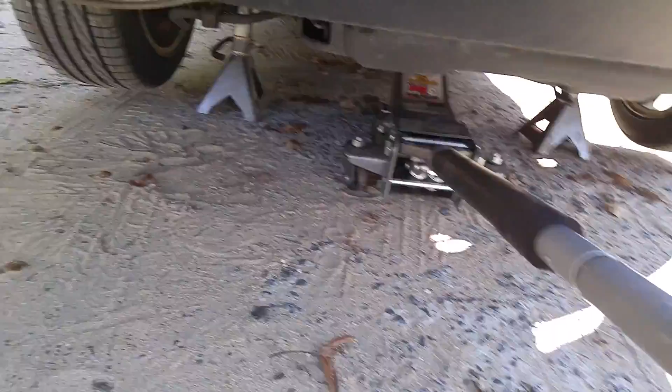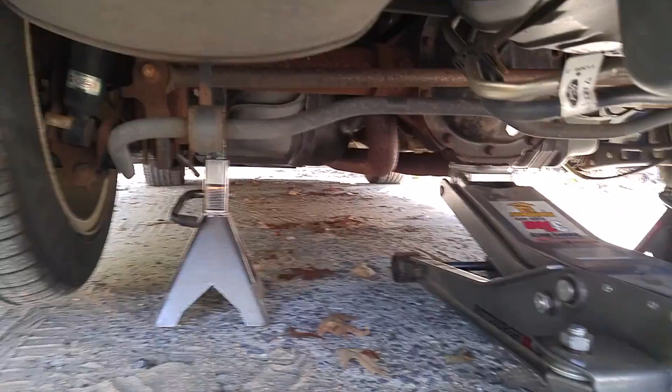First thing you want to do is jack up the rear of your vehicle. Put your jack under the rear diff. Make sure you don't put it on the differential drain pan that you actually bolt in. Put it underneath where it doesn't touch the drain pan, right under there. Jack it up and put a jack stand on each side of your axle.

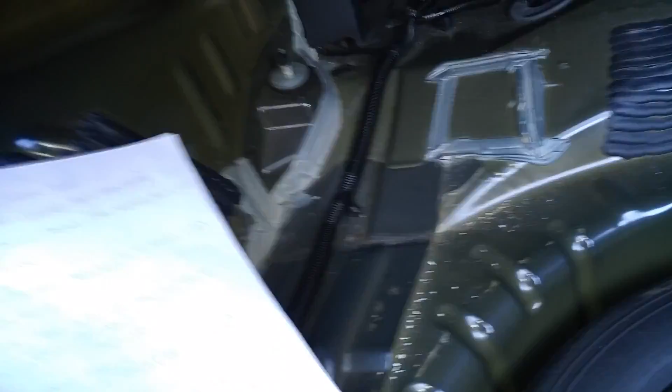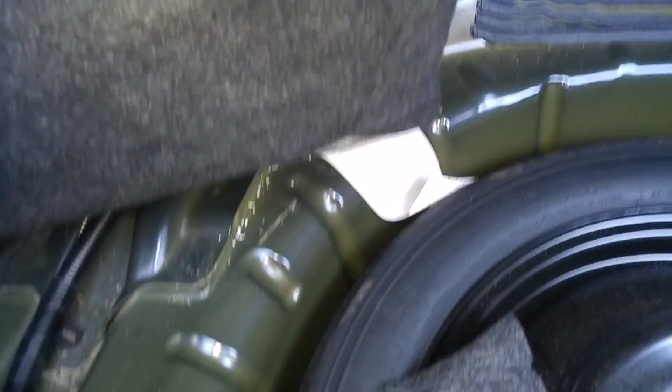After you do that, you want to come up and open up your trunk. When you open up your trunk, you want to take out these panels. These panels can go back like this. What you want to do is just remove your panel. The floor panel comes out easily. This panel you just take out and wrap it around, tuck underneath there.

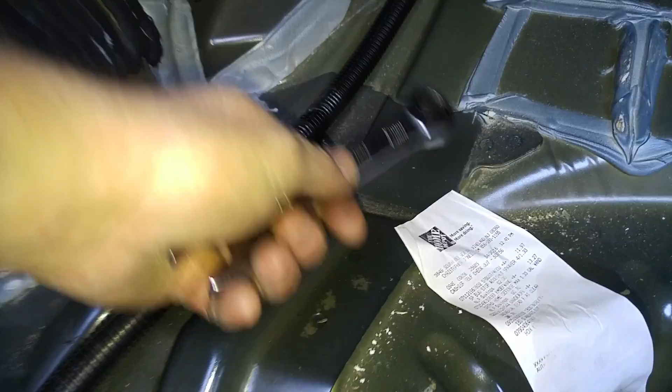Right here is the top of your shock. Alright, you got a bolt there. You take this out. That nut right there is a 15 millimeter nut. I'm gonna put that on top of there, I'm just gonna leave it there. If you try to take that out, it's just gonna turn.

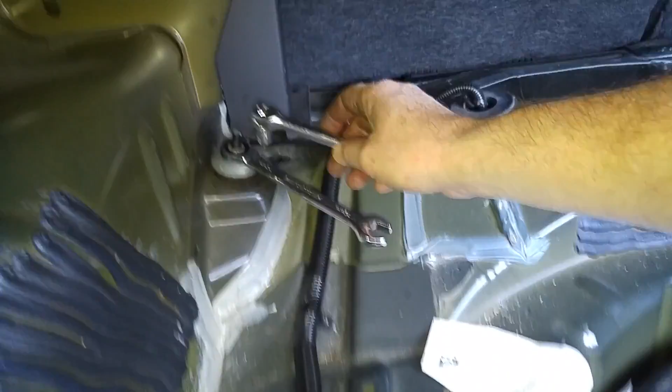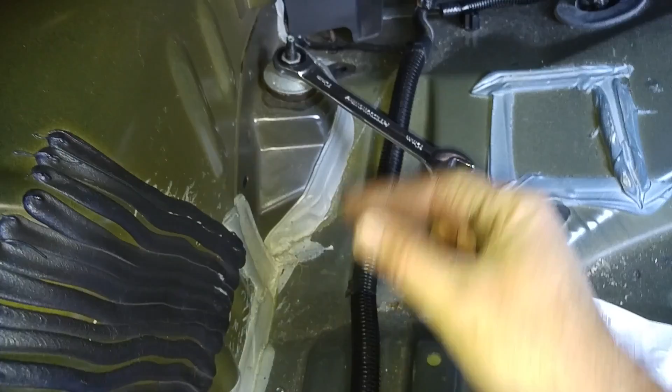So what you have to do, I went out and bought one of these strut nuts, or strut socket, excuse me for my improper grammar on mechanics. This nut fits right over like that, and as you turn it, it'll lock up so you can actually ratchet it out. Now if you don't have one of these, just use vice grips, because up here is flat, just a flat, like a square nut, fits in something like that.

And this is for shocks. And that just comes out. So what you're going to do first is you're going to remove your wheel.

Okay, and for my wheels I have a 22 millimeter socket. Alright, let me take this off. I'm using two hands, so I'll be right back.

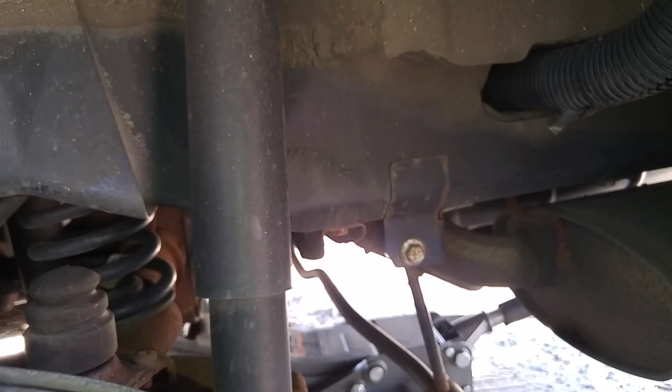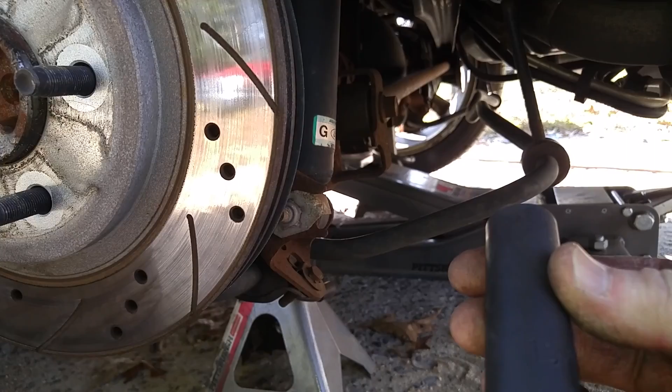Okay, here's the inside of your shock, and there's our bolt right here. That's our bolt. We're going to take this out with a, let's see if it's the proper size. Sorry for moving around on you, bear with me. Nope, that's not the right one. Okay, this is a 15 millimeter socket, and it goes right on this, right there. Bear with me, I gotta use two hands.

Now this will catch right here, so it won't be able to spin on you. There's your bolt.

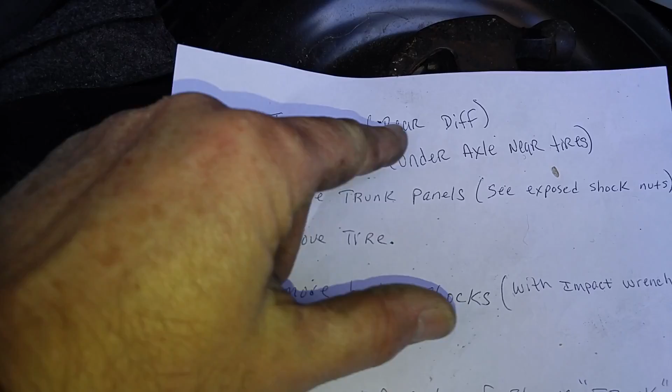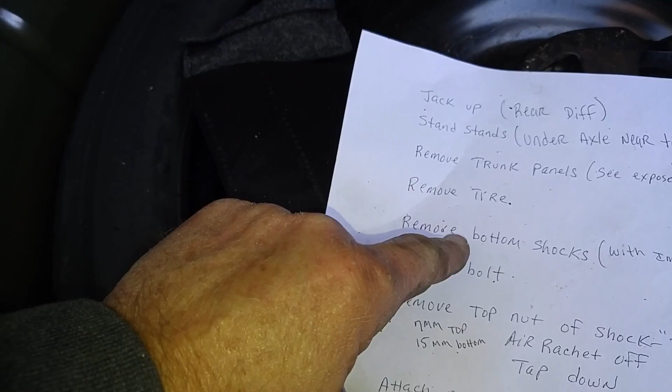So this is what we did so far, just to recap. We jacked up the vehicle, the rear diff, put our stands under the axles near the tires, removed the trunk panels. This is the trunk panels, what we did. Removed the tire, which we'd done. Removed the bottom shocks with the impact wrench. If you don't have an impact wrench, doesn't matter, just use a breaker bar.

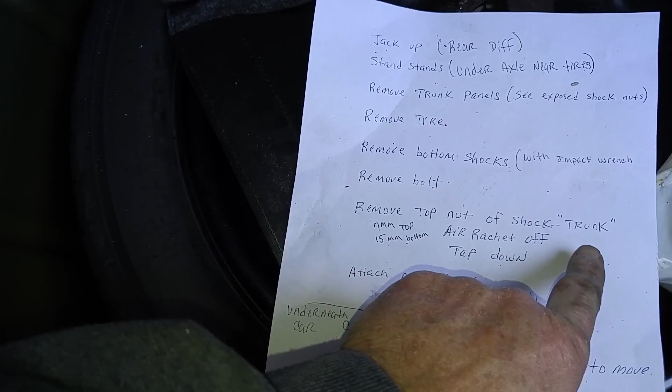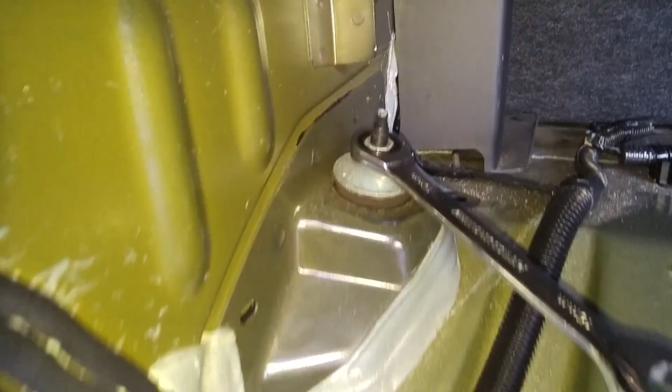Remove the bolt. Alright, now we're going to move up to the top nut of the shock at the trunk. 15 millimeter, and you can just use, like I said before, vice grips if you don't have something. Just make sure, it doesn't matter, you're not going to use this shock again. It's coming out, but anyway, let me show you.

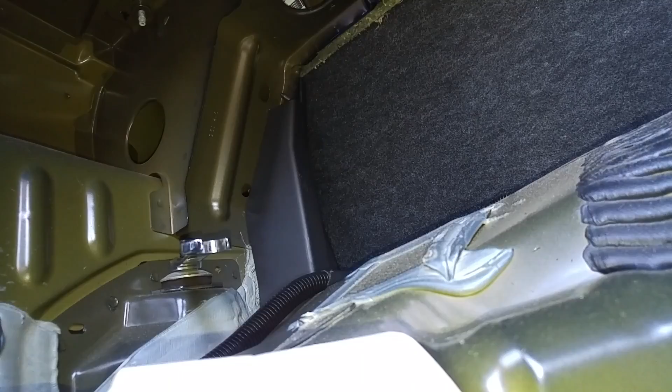Let me put this down real quick, and I'll pick you up, and I'll show you what I'm going to be doing.

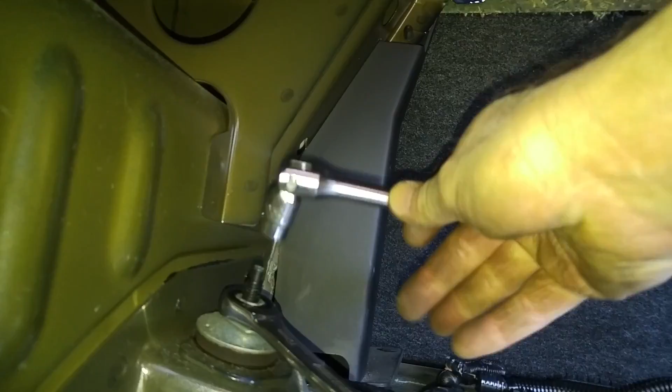I just put that sucker on there like that. Oh, got it. Duh. Turn it around, idiot. Jesus.

Hey, we're making progress though. If I can help you save a couple hundred dollars, well then it's all worth it, right?

And just turn it, sometimes it'll be hard to break free. You keep turning it till it catches on something. And then this, I'm going to have to use both hands for a second. I'll be right back. Okay, I got it.

Sorry about that, had to put the camera down. Just unscrew this sucker. If you don't have a ratchet wrench, a regular box wrench will do, but this just makes it go faster.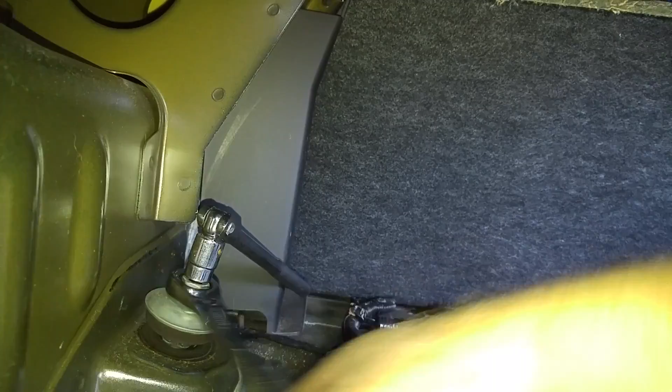Sucks moving in the car like this. Precarious positions.

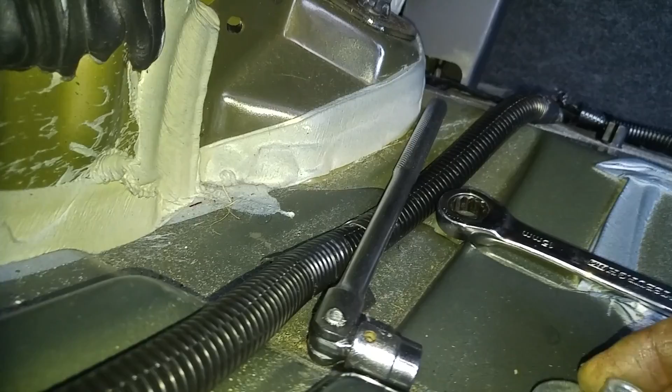Alright, that's out, and that's what that looks like. Just so you know when it's all compressed. That this actually comes out, or maybe it doesn't, it's just designed that way. This is the original Ford part.

Alright, you see this? We're going to tap that out. Grab yourself a hammer. Say goodbye. Alright, and there's your shock.

Alright, now look, so I know I can get the other one on, I always keep this, but this is what it looked like. It was creaking, looked like I had a bunch of mice in the back, so I knew it was time to change my shocks.

Sounds like it's nice. Now let me show you a trick. Let me show you what the important part is. I have to get my son to come out here to hold the top up, but...

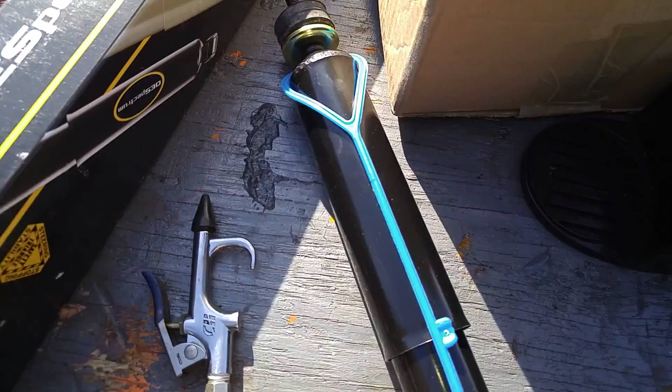That's what I want you to understand. A couple of things. When your shock comes, okay, this is going to be your new shock. See this strap on here? Don't cut it off, because this is going to be equal to where your bolt is going to go. So if you cut it off, it's going to expand.

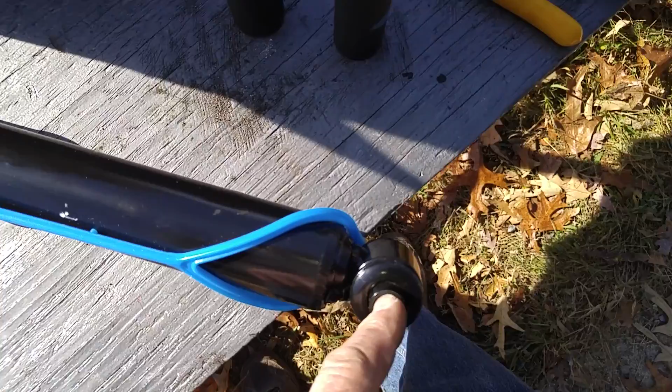If it does, guess what? You can just jack it up from the bottom till it meets the hole. Till it meets, oh my God, meets the hole. Okay? And this is what I wanted to show you.

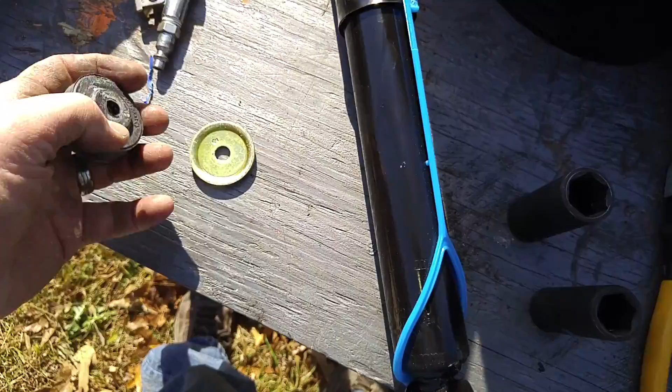Another thing I wanted to show you. I already put this on. I'm going to take it off. You're going to have a metal bushing, rubber bushing.

I'm just holding the camera, you won't miss anything, I'll show you. Alright, that's what you're going to have. This is going to be your equipment.

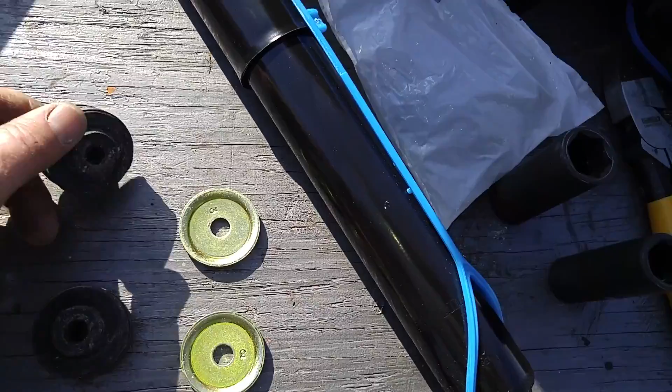Metal bushing. Another metal bushing, so you're going to have 2 and 2, and 1 nut. Okay, this is the trick. I'm going to show you how to put them on.

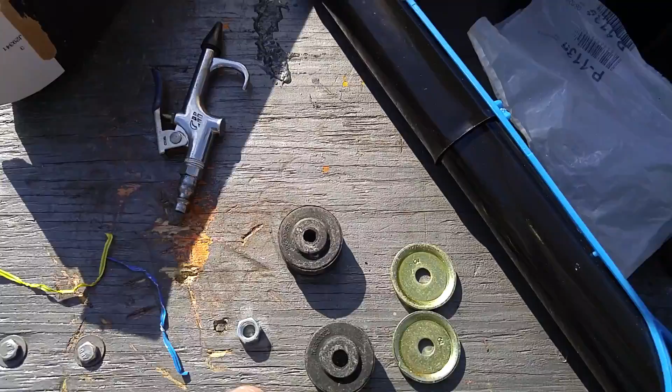Okay, first take the metal bushing. I don't know what you call it, I believe it's called a metal bushing. Alright, let me get that down at least. Hold on one second. Good enough. Okay, have your metal bushing like this.

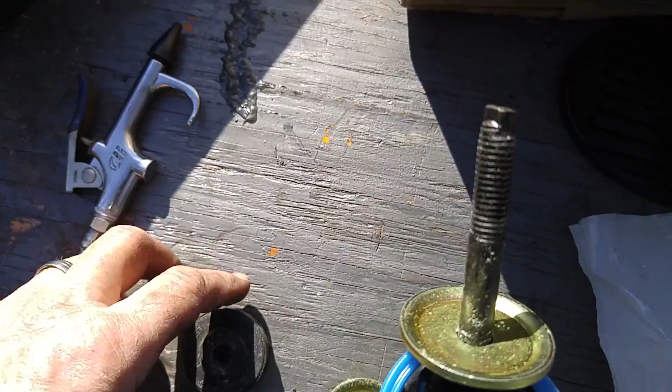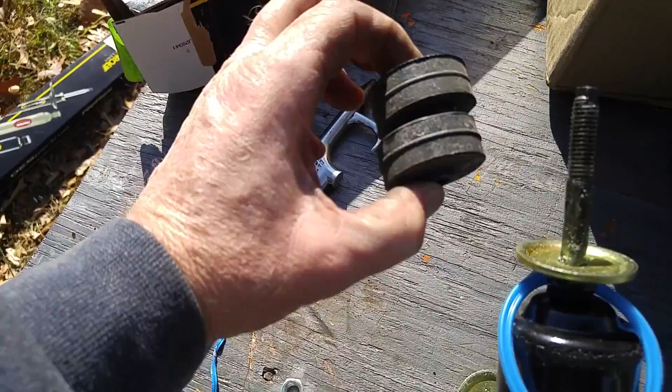Now look, these two have got to touch. When I say these two, let me be more specific. I hate it when people are not specific, and here I am doing it to you. That's how it's supposed to go when it's on. Okay, but don't do that yet. Alright, but that's how it's going to be.

This is going to be in the trunk, like this. Alright? That's going to be facing down. So, this is what you're going to do.

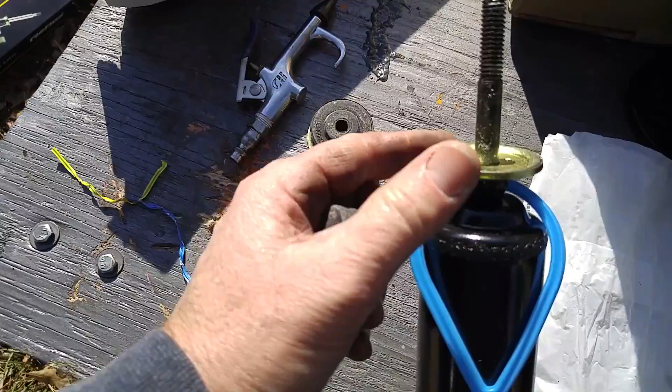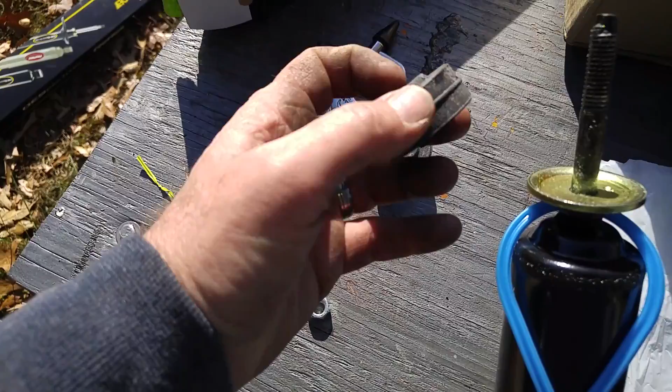Let's go back step by step. Your metal bushing is going to go on, like that. Then you're going to have your small hole, then the big hole. What I mean by small hole is this: you're going to have a small dimple, then you're going to have a big dimple, or nipple, whatever—small nipple, big nipple.

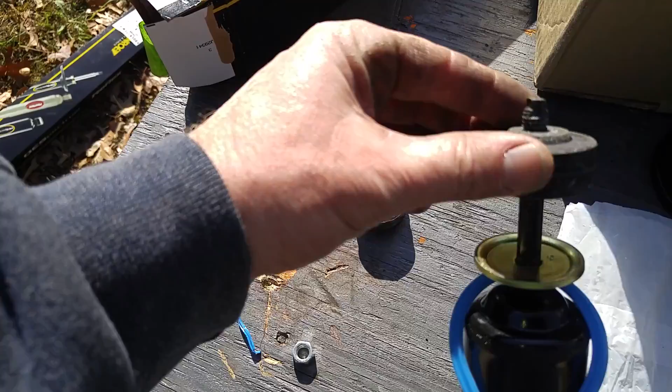Okay, alright, it's going to go on. The small nipple is going to go on first, boom, the big nipple's up here. Okay, what's going to happen is you're going to walk your shock over here. You're going to put your shock in from underneath. Alright, now...

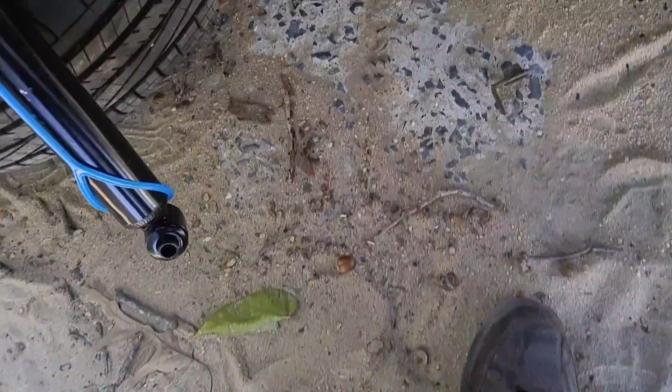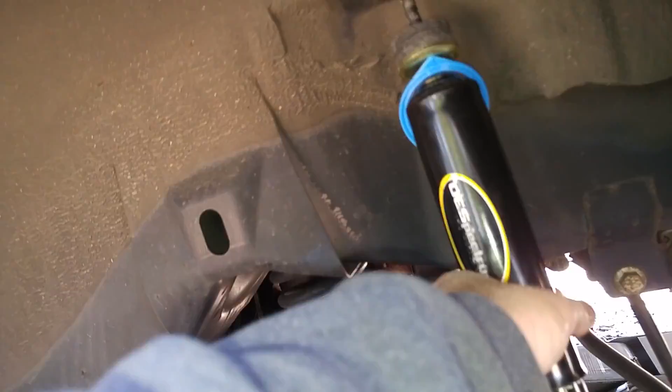Maybe I don't need my son to help me out, we'll see. This is what we're going to do. That's going to go up through here. See how it's going to go up? Right through there. Alright, let me put this down for a second.

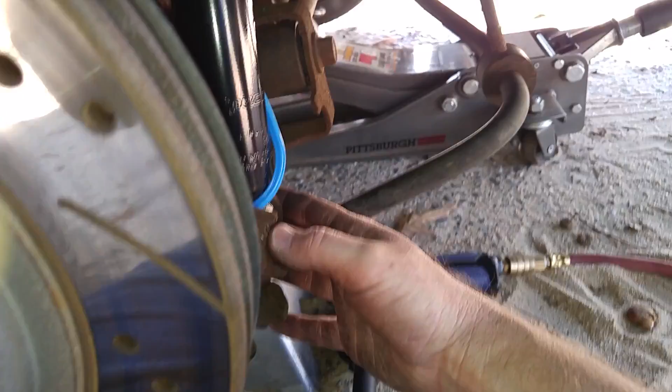Here's what I did, I put this in. Okay, I probably jacked it up exactly where it was supposed to go, because I saw another video and this wasn't lined up and they had to cut this, and then this would slowly come down and the guy slid the bolt in as it was coming down. But apparently, I'm hoping, I jacked it up. Hopefully I'm not doing anything wrong, God help me. I must have jacked it up to the right angle.

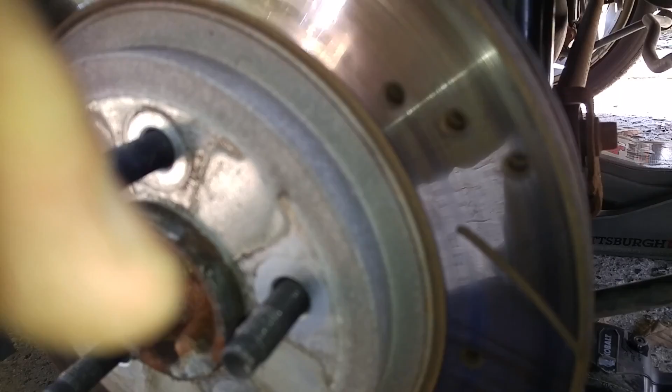And I literally had to push that with my hand and it went right in. Now I put in the bolt. That went up there. I'm not going to tighten this down yet, but this goes right on here. Alright, let me push that out a little bit.

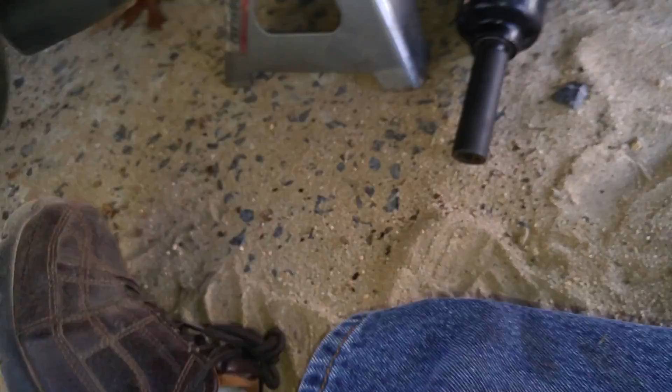And see what happens is this fits in here. So when you turn it, it only goes so far, so you don't have to get another. I'm surprised Ford did that.

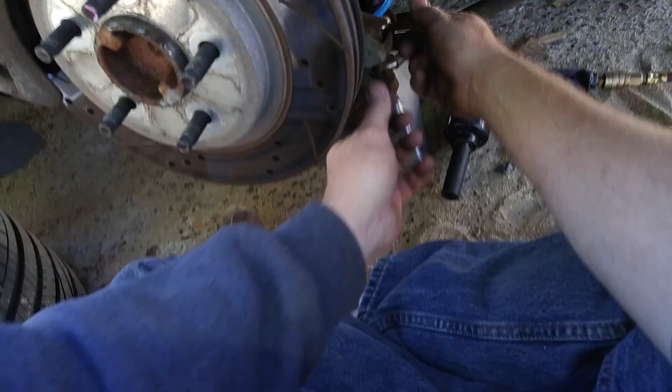Let me see if I can hold it in my chin so you can watch. I don't know if you can see it, but... oh, sorry about that, damn it. I just screwed it just enough to hold it, not to tighten it up. All right, now let's go back to the top here.

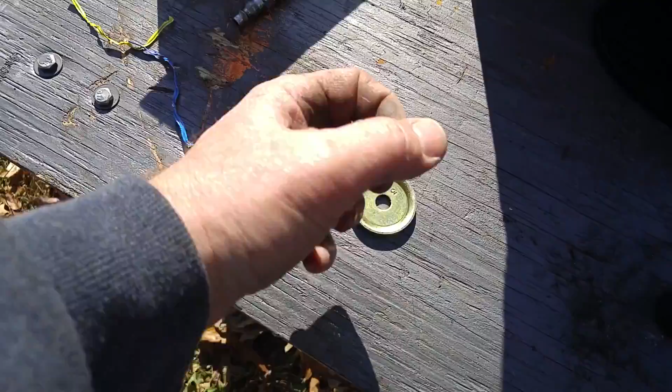I'm gonna show you something. Remember what I showed you already? The first step on the shock. All right, come over here, grab your other pair of equipment: bushing, the metal bushing, the rubber bushing, the metal bushing, and the nut. Phew, you can tell I got ADHD. You're probably saying, get to the point, idiot.

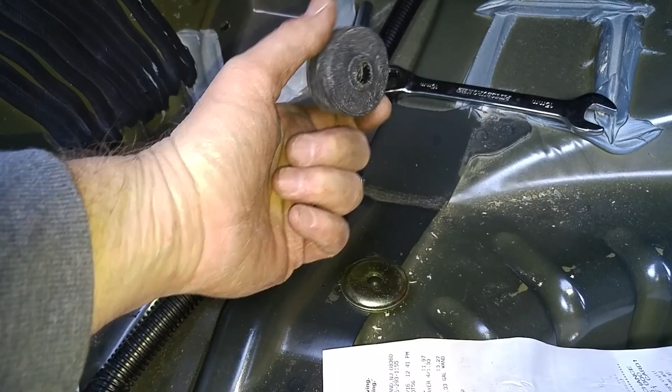Alright, now, what's going to go on is this. Remember how I told you? Alright, your big nipples are going to touch. Just remember, big nipples touch. I don't mean to sound sexist or anything, but it kind of does, but it's not meant to be, okay? But the big nipples touch.

Okay, put that over there like so. Alright, that goes on like so, because that's the shock coming through, okay? Big nipple touches the other big nipple. Alright, metal bushing goes up. Alright, this nut goes on.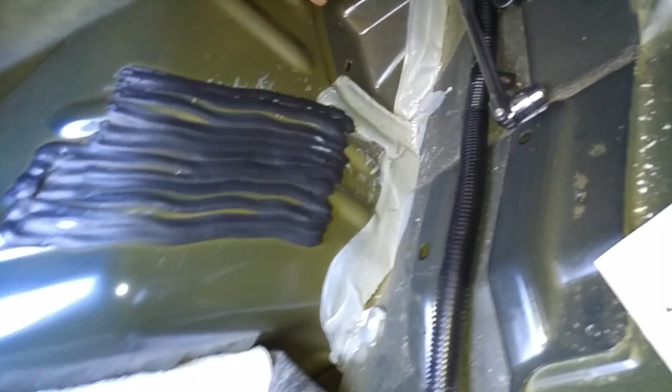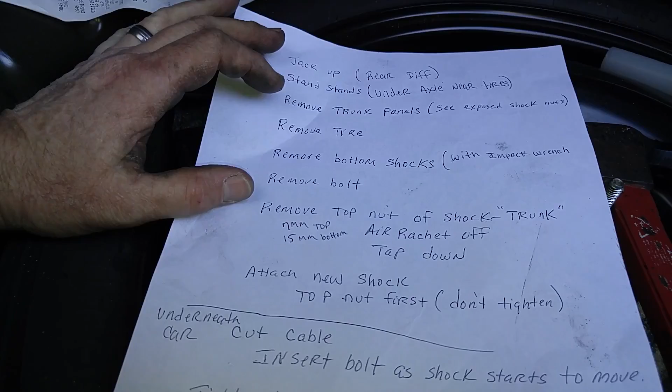Okay, like so. I'm hoping that's what goes on. All right, now let's recap what we did. Okay, remove bolt, we already did that. Remove top nut of shock, we already did that. Attach new shock, top nut first, don't tighten.

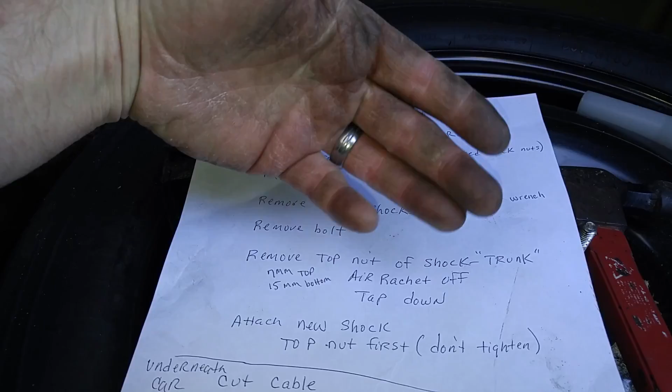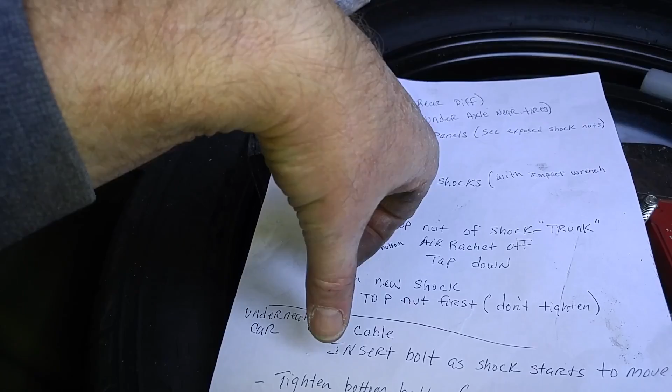Well, I kind of reversed it, which I did the bottom nut, but it was just so damn easy. I didn't tighten it up though. All right, cut cable, which I didn't have to do yet. Insert bolt as shock starts to move. Okay, which we didn't have to do because I just pushed it up there like I told you before. Tighten bottom bolt. All right, now up.

All right. I'm hoping I'm doing this right. Yeah, it's the wife's car. I don't want to piss her off. Okay, now let's make sure this is... alright.

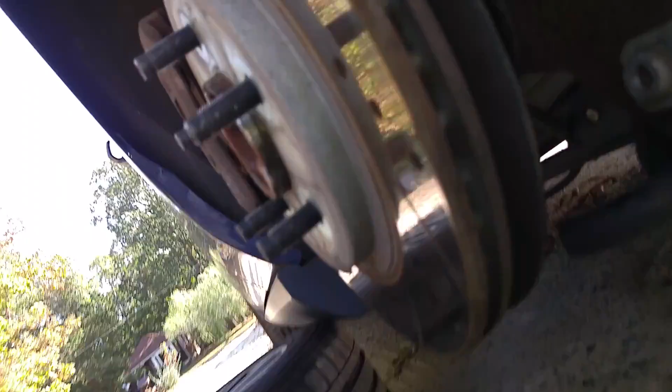I'm doing this one-handed, so. Alright, see this? Here we go. Okay, now see this?

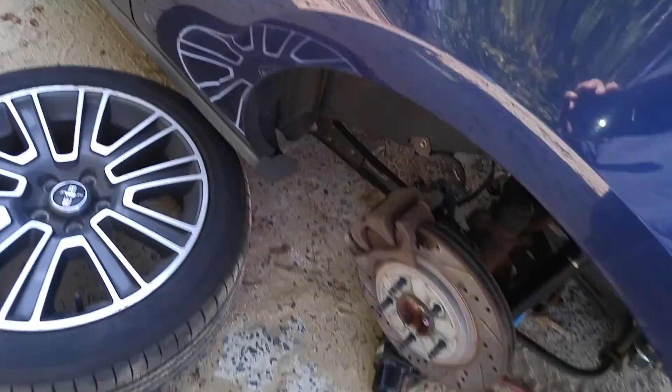What you could do, let's cut that out. Be a nice idea to get the pliers, wire cutters. You can use wire cutters, or you can use scissors on them. Man, sorry for bouncing this thing around.

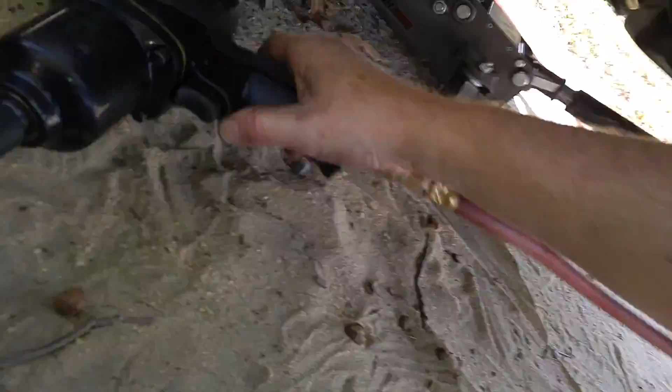If I'm offending everybody, I apologize, but I'm just describing them. Shit. Alright, now I got an air ratchet. I got little tools, trust me, I didn't buy these things. Damn it, let me put it down again.

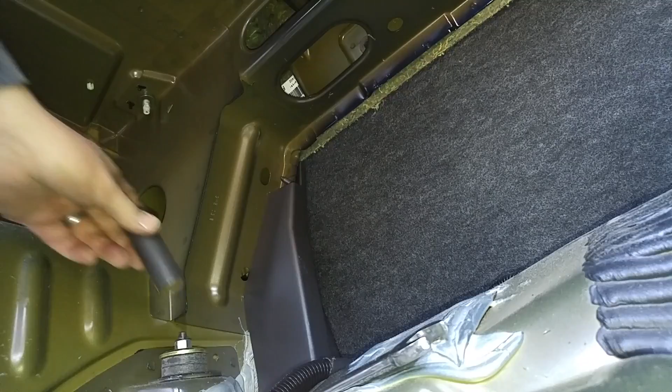And we're going to tighten that down. Okay? And give me one second. I should get a stand, shouldn't I? Let's see. Okay.

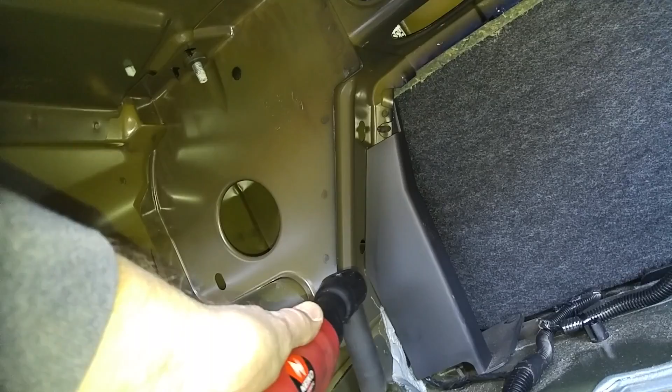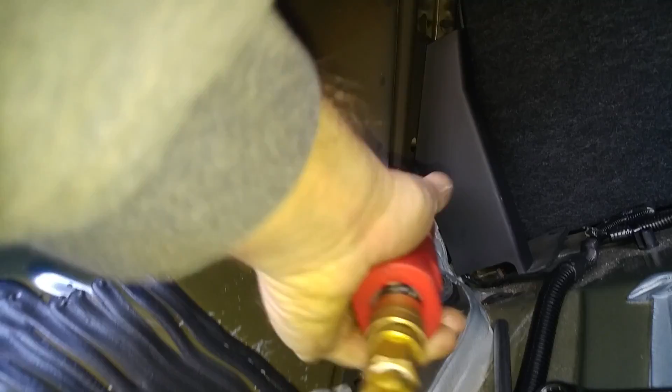Alright, and then what you're going to do, you're going to tighten it down to about the size that looks like that, like flattened out bushings. Alright, put it over top here. And there you go. That's all she wrote. Alright.

If you don't have an impact wrench, use a lot of persuasion with a ratchet and a cheater bar. Okay? You do the same process. The only thing that I was told by a mechanic, the only thing they use impact wrenches for is speed. You do the same thing with the cheater bar, same thing with the ratchet you could do with an impact wrench. It just works faster for them because they're under a time constraint for labor costs.